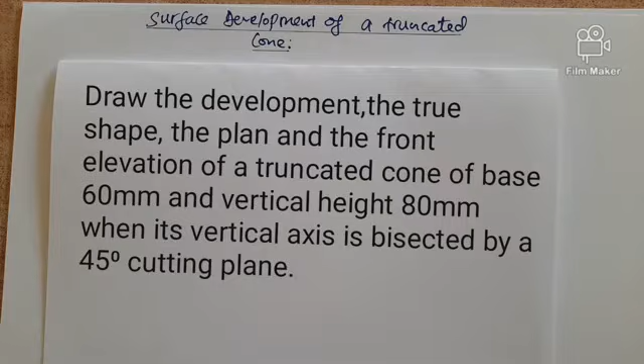are expected to. Now in this case, first of all, we are going to have our plan of our cone, which is a circle. Then we shall draw the front elevation, which will be in a shape of a triangle, although it's a cone, and then we shall truncate it at 45 degrees, a line at the center point of the vertical height of that particular cone.

So the first thing is to be able to draw our plan, and our plan, as we said, is going to be our circle. We are taking that one as our baseline. Then we're starting from there to draw a circle. Now a circle will be of radius 30 millimeter because the cone is of diameter 60 millimeter. So now we shall measure our 30 millimeter and then we draw the circle.

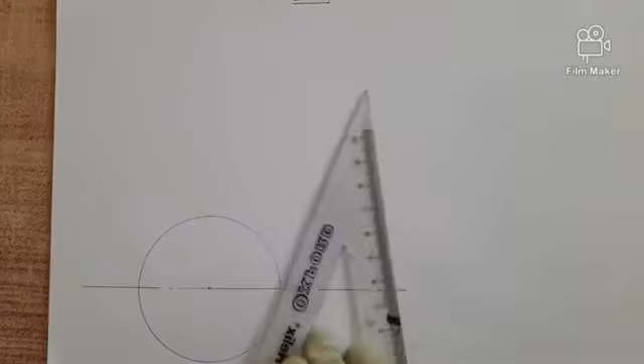That is our base. It is our circle. Now this circle is assumed to be our base for the cone. And then we are now going to draw the vertical height of our cone. And the vertical height, we shall project our center line through the center point of our circle so that it goes vertically up to be able to give us our front elevation. So this one's our center line.

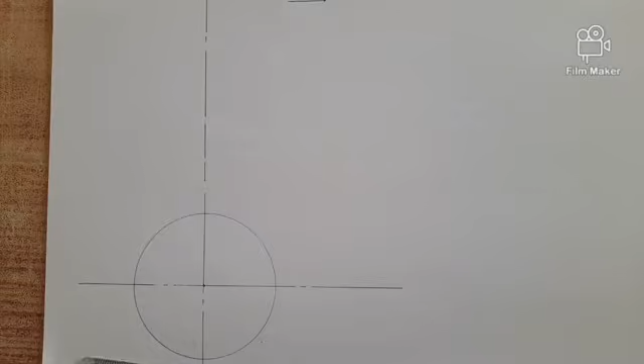So we can just draw it vertically upwards. Can go as far as you want. Then we shall draw our front elevation, of course, above our plan, and therefore it means we can have a horizontal base just above the plan. We have our horizontal base. This is a reference line for the plan.

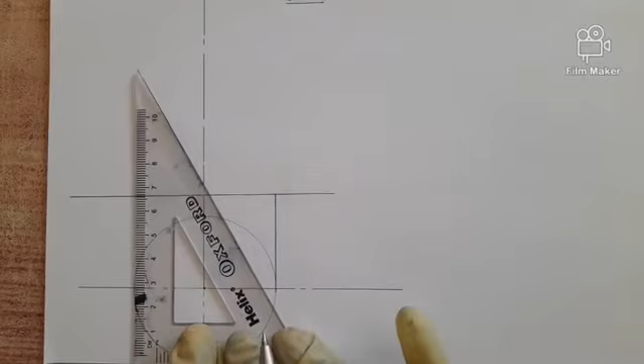Then we project lines from the plan to meet that horizontal base. So we project this to meet the base. We also project this to meet the base. The next thing we shall do is to measure the vertical height, and the vertical height is 80 millimeter. So we are going to measure 80 millimeter and we transfer it here. So this is our 80.

As you can see, this is 80. So this is the vertex. We can call this one point V as the vertex. Then we join it back to the base from the vertex. You can join it. The vertical height, as we said, is 80 millimeter. So you join it back to the base.

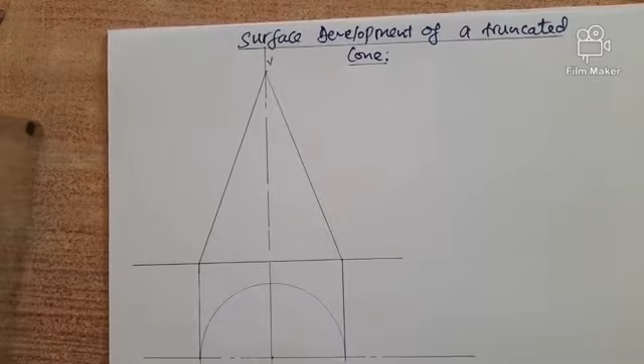Now, because this cone has been truncated by a cutting plane at 45 degrees to the horizontal, or bisected by a cutting plane at 45 degrees, it means it is at the midpoint where the line is going to pass through. Then we have to draw that particular line, and it is at 45 degrees to the horizontal. So we are going to have our midpoint, it is the 40th mark. So we measure from here up to the 40th mark.

Now this is our 40th mark. With your T-square and a 45-degree set square, you can draw the cutting plane through the point. So this is my cutting plane, cutting through the point. Then from there, we are going to divide the plan or the circle into 12 equal parts. How do we do it?

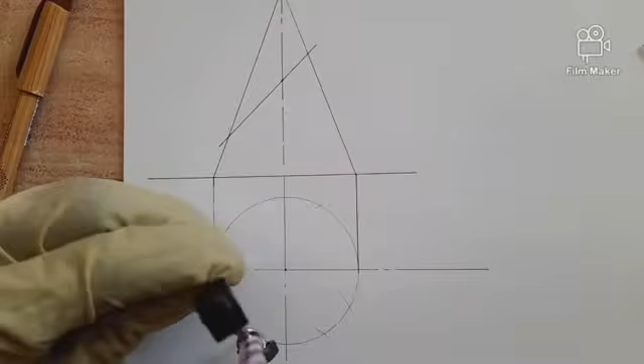We take the radius. With the radius, you can stand with it at the end point where the center line meets the circumference, and make arcs on the circumference. What we are doing is we are dividing the circle into 12 equal parts. So these ones are 12 subdivisions. You can join them correspondingly, so that this one and this one, you join them correspondingly.

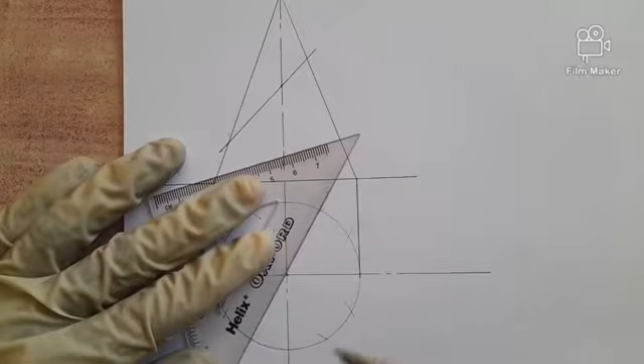Okay, we have joined that. We can also join this through the center point. There it goes. Now you can number them as 1, 2, 3, 4, 5, 6, 7, 8, 9, 10, 11, 12 parts. Okay, then we are going to project them back to our front so that we have lines joining to the apex.

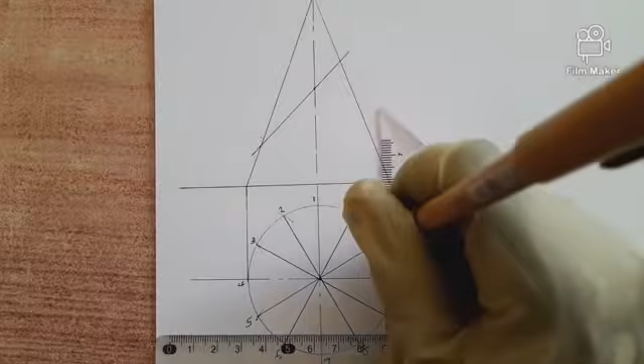So let's join those points to the base, or project them to the base of our cone. There, we bring this in that order. There we go. Again, we can name.

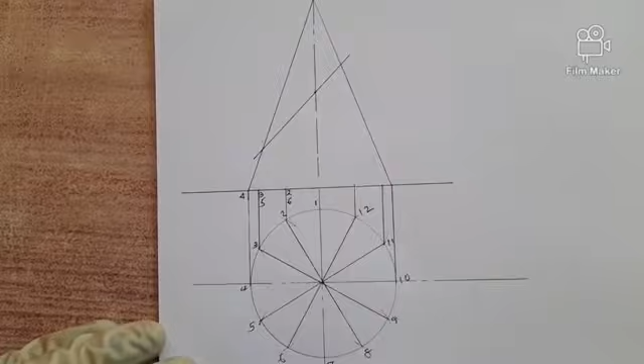This is point 4. This is point 3 and 5. This is point 2 and 6. This is point 1 and 7. This is point 12 and 8. And this one is 11 and 9. The last one is 10.

Okay. Now we want to finish drawing our front elevation so that we can have the truncated cone itself. This one, it means we are going to use an outline, because we are assuming these other ones are just construction lines. So this is our expected cone that has been truncated. So we join.

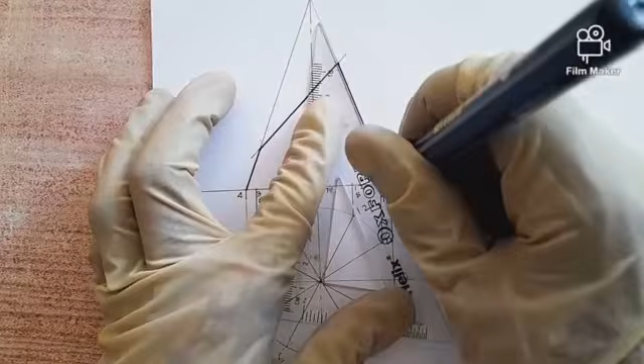Okay, now we are through with our front, although the plan we are not yet through with it, because we've not included the cut face, this cut face on our plan. We shall do it later. So we are going to join these points of intersection between the base and these vertical lines to the apex, so that this one is joined there. Okay, and then this one again, we join it.

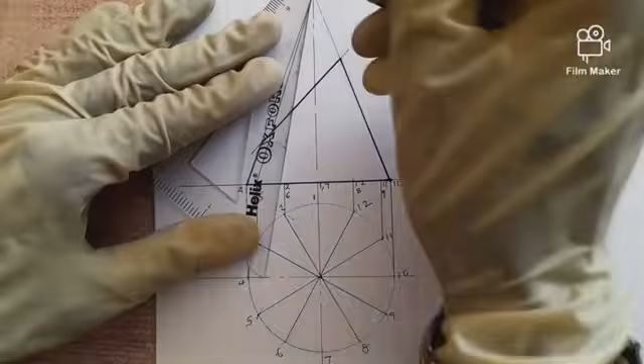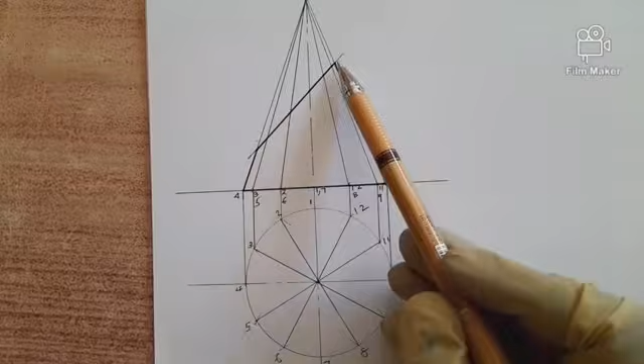Now, after joining them to the apex, we are going to drop them vertically downwards so that they meet our plan. See, what we are saying is this is the truncation line. We have these lines going to the apex. Where they meet the cutting plane, we drop them vertically downwards, because we want to transfer this face on our plan. So we are going to take our horizontal base together with a vertical edge to drop them vertically downwards, starting from the first one.

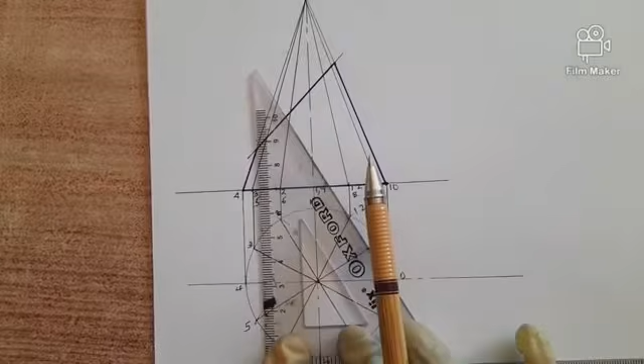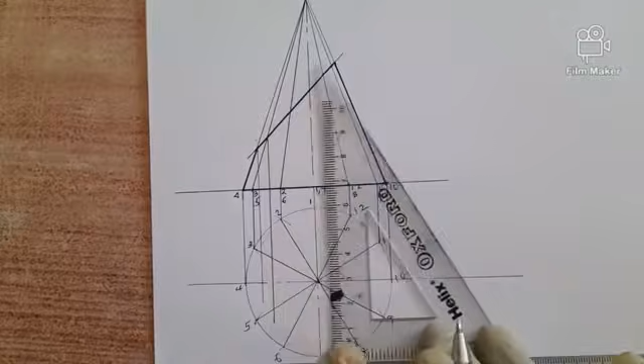Here it is, the point of intersection between the outer line and the cutting plane gives us that point. So this point. Then next we are going to drop this. Do the same thing. Come, drop this. Next, this one here. Okay, we look at it where it cuts, then we draw a line. We continue that way. So we have dropped them.

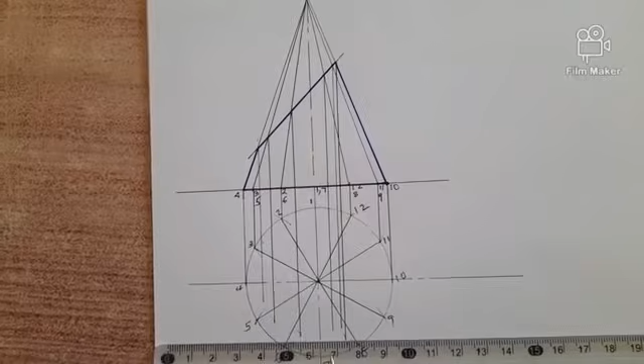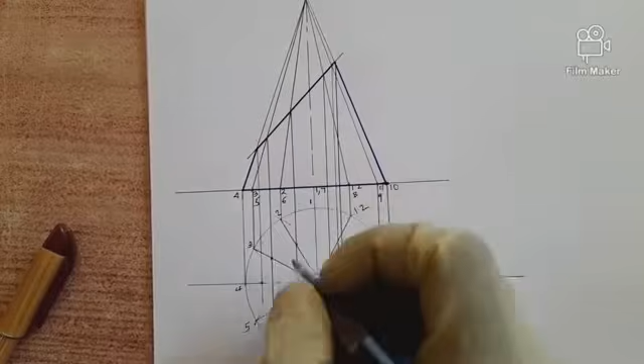Okay, now you'll realize that those lines that have gone downwards vertically will be meeting these radial lines, or these radii, at given points. For example, the first one that we dropped meets it there. The second one meets this radial line and this one here. Let me use a different pen. And then this one here meets it here and here. This one meets here and here, and this other one meets here and here, and the last one here meets there. So we are remaining with this line.

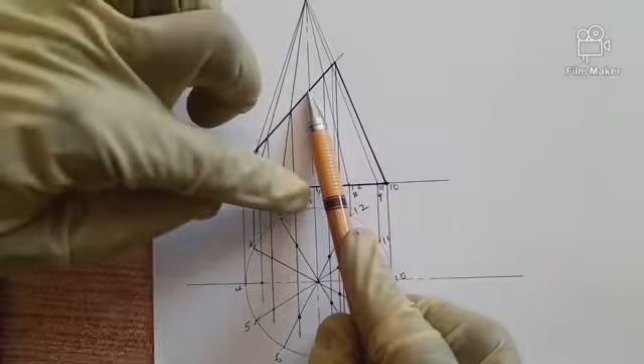We want to know where the curve is going to pass through on this line. How do we do it? We are going to draw a straight line parallel to the base from the point of intersection between the axis and the cutting plane back to our sloping line. Then you drop it down to meet this horizontal axis, this center line. Then we take this radius and draw a curve; where it cuts this line here and here gives us the 2 points where the curve will pass through.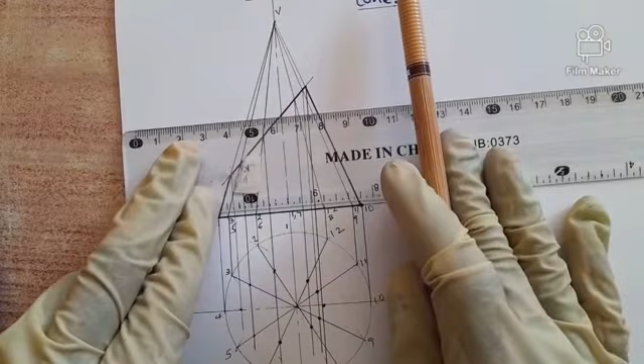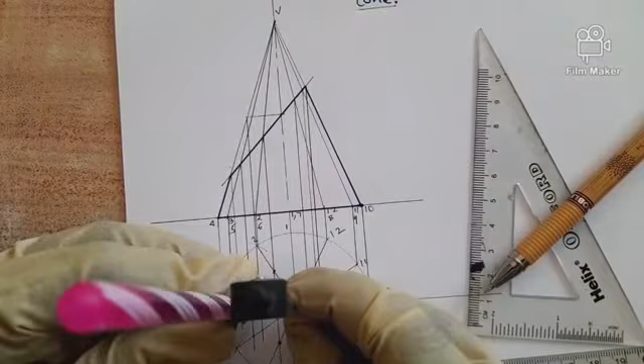So we first of all bring this line to our sloping plane horizontally. There it goes. Then we drop it vertically down. There it is. It meets there. Then we take this radius from the center and we draw a curve. You can draw this curve or just make arcs. Once we have it, we can establish this point and also this point.

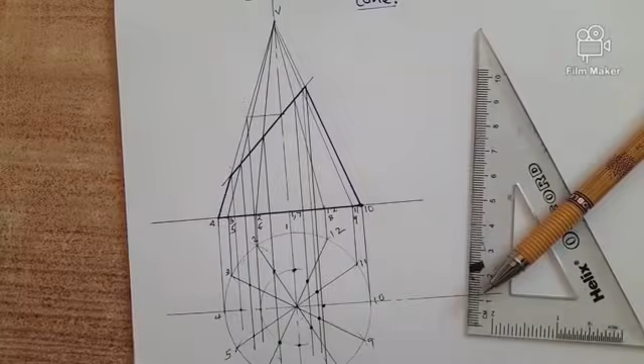So we are going to join them so that we come up with our inner part. And how do we join it? We can use what we refer to as French curves, or if we don't have them, we can join the points freehand, so long as a fine curve is maintained. So we have done our plan for our truncated cone. We have the inner part. This one represents the face that has been cut, and this one represents the outer part, the larger circumference.

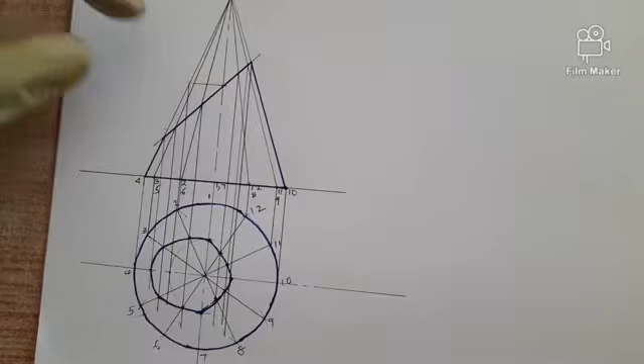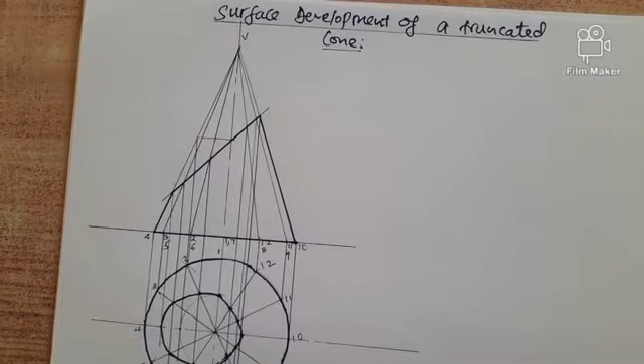Once we are through with that, we need to draw our true shape. True shape can only be drawn if you view the cut face at right angles. That is, you draw another shape of the plan on this other side so that it's perpendicular to the cut face. How do we do it? If we have a small space here, you'll have to draw it on the opposite side, because those lines are the same. If we pass a line through this point to this side, it's almost the same thing. So we can see whether it will fit here.

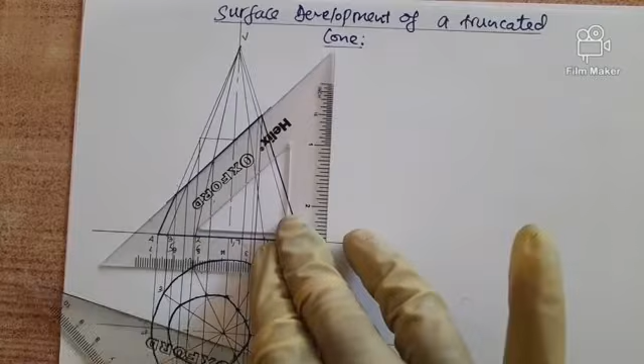It fits. So what I will do is, first of all, to draw a perpendicular line to the cut face. How do we draw the perpendicular line to the cut face? It is very simple. First of all, we can first pick this. Okay, this is the face. Now if this is the face, we want to draw a line that is parallel to it. So we can move this face parallel downwards to give some allowance for us to draw the perpendicular line.

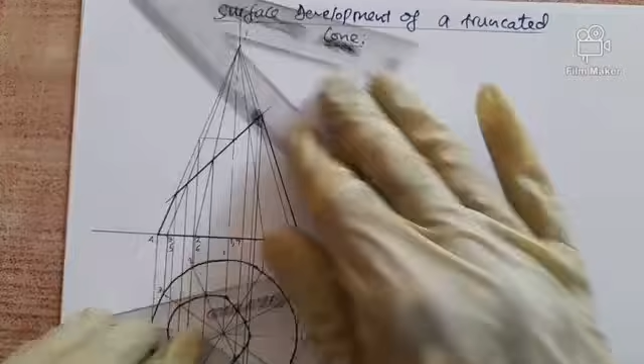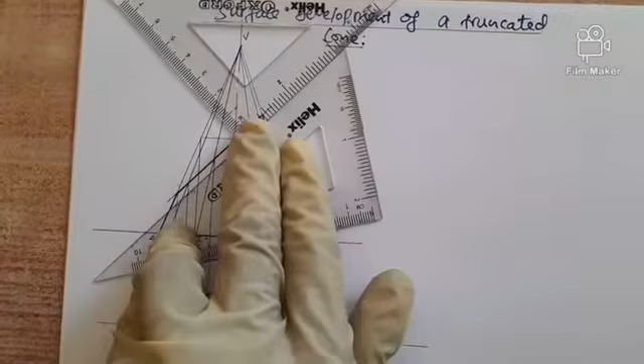Let's say this is the movement, so you move it this way. Once you've done it that way, you bring another line, you draw it. If this one has fluctuated, we can still repeat. You bring it here and then slightly just move it, you slide it on this side, in that manner. Then once you've done that, you come with your line that is perpendicular, and you draw it from this point. Of course, it is the center point.

You can do the same with all other lines. So the second line is this one here. You draw it in that order. So you continue drawing the lines. So those are the projections. What we shall do is we are going to carry these points individually, follow every line, and then we transfer them. What we are saying is, if you come at this point, because we expect to transfer this point, okay,

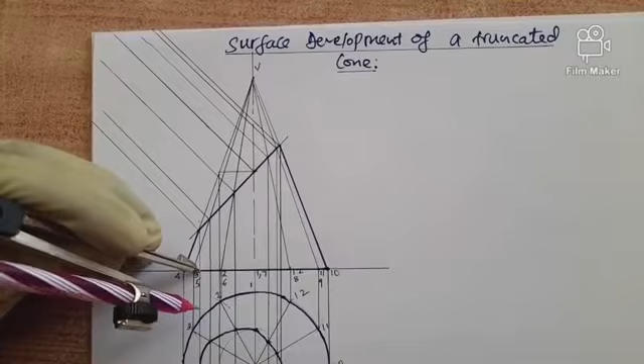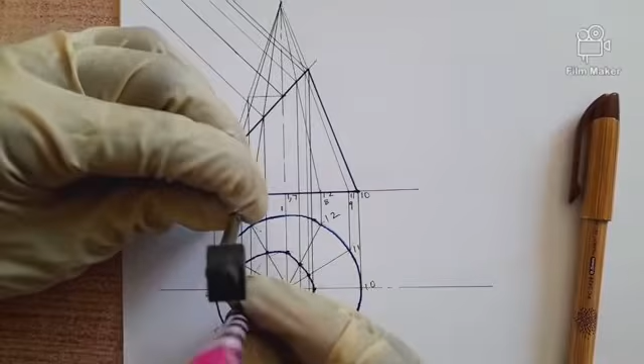this one here, you take your compass there, you come with it on the same line here, then you make an arc, okay. Next, we want to do this and this, so we carry it from here, we come here, we carry the first one, we come with it on the same line, we make an arc, we come back here, we carry the second one, and we come with it here on the reference line, we cut.

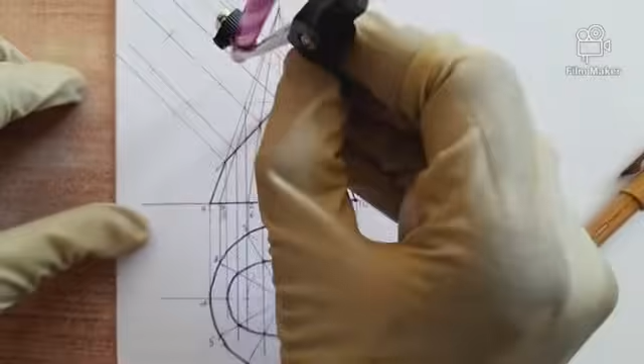Next, we want, which one? We want this and this, okay. So here we are going to use this point from here, the first point on the same line, we cut, we come from there, the second point on the same line, we cut. Next, we want this and this and this, here it is. So we are going to use this, take that on the same line, transfer it, come back, carry the second point on the same line, cut.

Next, we want this and this, so we use this as our reference, come, carry on the same line, you cut. Next, we want the other one, so we carry this, come with it, transfer. Next, we want this and this, okay, so we are using this, so here carry this on the same mark.

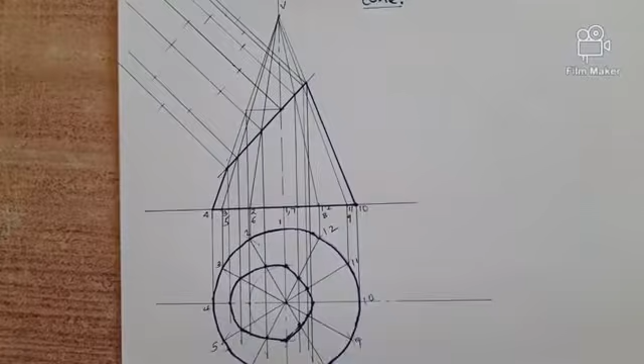Next, that, okay, same, transfer it. Lastly, we want this, so this one here we are using this, so this back here on it, here it is, finish. So we are going to join these points with a fine curve. So what we have drawn is the true shape of the cut face.

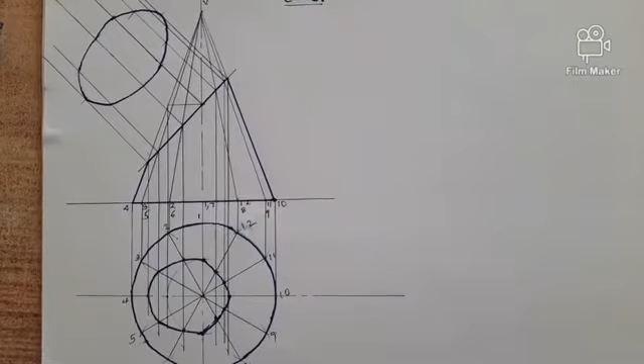The next thing we are going to do is to draw the development. How do we draw the development? The development is like we are going to unfold the truncated cone, so that we now have the net. We just carry the same distance, we transfer it. Now let's do it. We are going to carry this and we unfold it, it's like we are drawing a net. If we draw a net, it will cut through here, so we have to transfer this point V somewhere here because we need some more space. It is easier to do it.

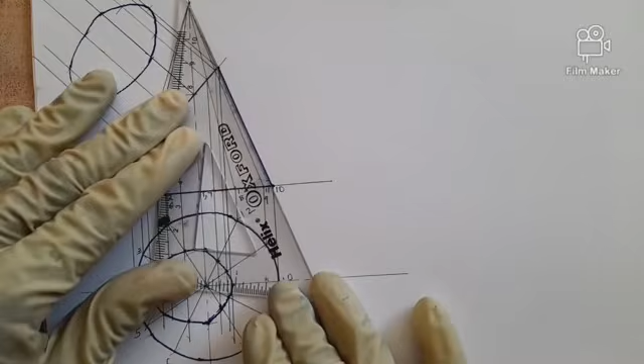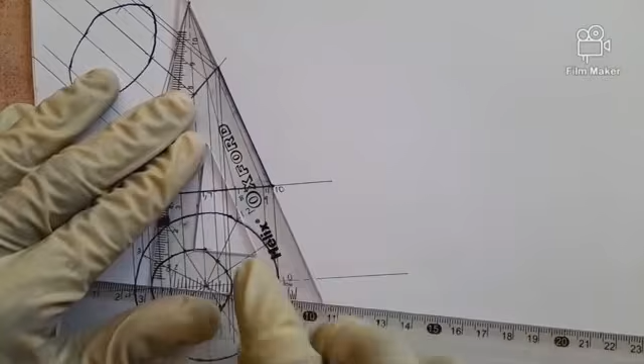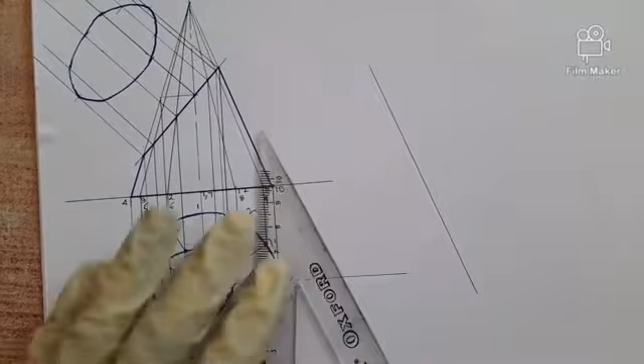So what do we do? We are going to first of all transfer this point to come up somewhere here. We can first of all have this line, and then we move it. How do we move it? It should be parallel. So if you want to move it, you can first of all realign, and then that's the movement. We have moved it. Here it is. So we can now draw it here. You can as well draw it to any length or measurement you want.

Now let's say you want your V to start from here. This is V, okay? So you take your slant height, here it is, and come with it and draw a net.

We draw our net. Okay, now we do not actually know the angle subtended by that arc. How do you know it? First, we have to calculate by saying that that angle equals r over true length multiplied by 360. Our r is 30 because we're using 60 as the base. Our true length is from this point to here, okay? Or it's like the slant height.

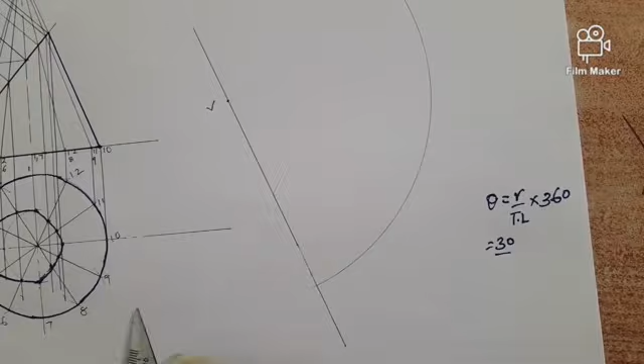And then this slant height here, how do we get it? We use the height and the base. So we are going to use height squared plus base squared, okay? And then we take the square root, and we multiply by 360 degrees. So this is 30 all over the square root of height squared plus b squared. Let's see what we shall get.

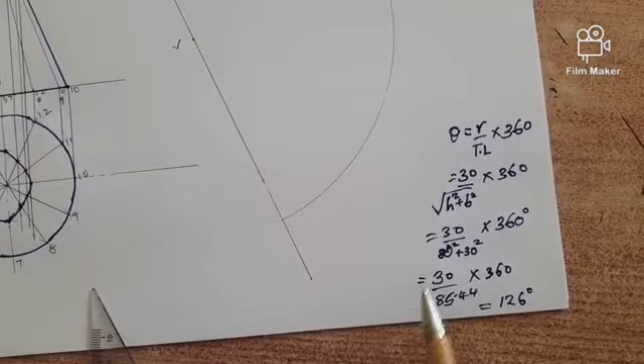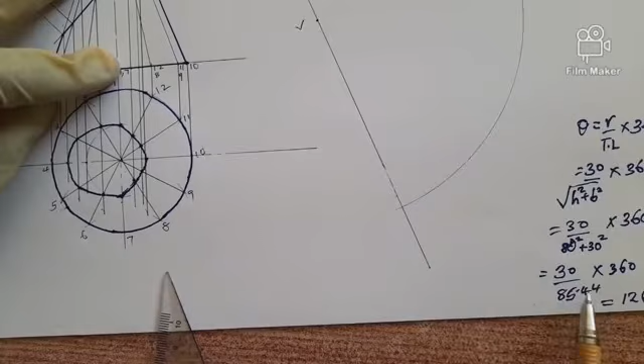So when you calculate, you realize that our height was 80 squared plus our base, 30, the radius base, this distance from here up to here, because this is 60 and this one becomes that. So it's like we are taking this triangle with height 80 and base 30. So the hypotenuse is this one squared plus this squared, then you get the square root. We get it as 85.44, meaning this is the true length. So if you calculate using 360 degrees, you get the angle as 126.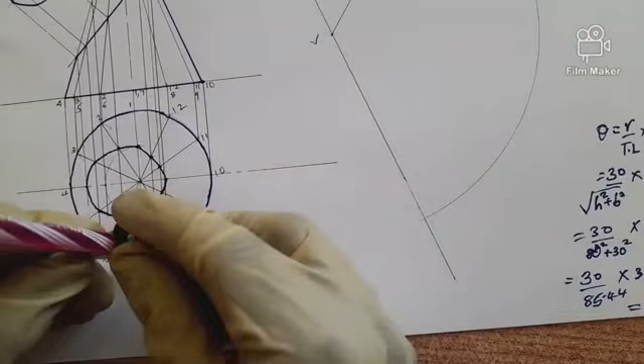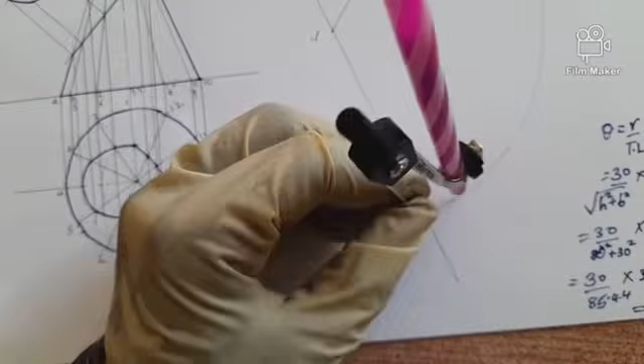So we are going to measure 126 from here. So we measure 126. So 126 passes through this point here. Okay. Once you have that, we are going to take this measurement, these 12 parts, and you transfer them. Okay, the way they are, we are going to transfer them along this. They are going to be 12 in number. So we just step; we call it stepping off.

So we have stepped them, although you realize that they might not be equal to the last one. Why? Because this is estimation. We cannot say you are stretching this one to form a straight line and it gives you the true measurement. Because our angle we did through calculation, we did not estimate, and that's why it is that way.

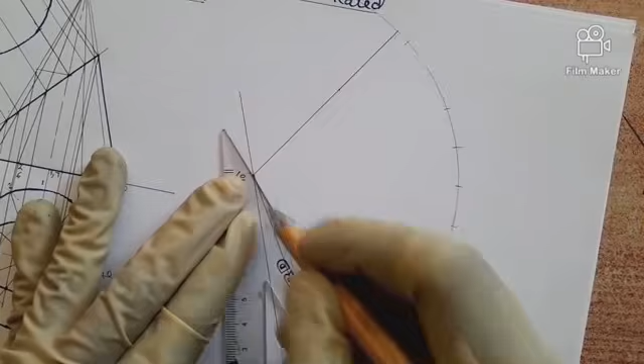So we can join. So if we want to unfold it from this point, it means you start by having your 4, you continue 5, 6, 7, 8, 9, 10, 11, 12, you come back to 1, 2, 3, 4. That means if you start with 4, you end with 4. Then we are going to carry this from here to every point, okay? Then we bring and draw arcs. So that means the first one is here.

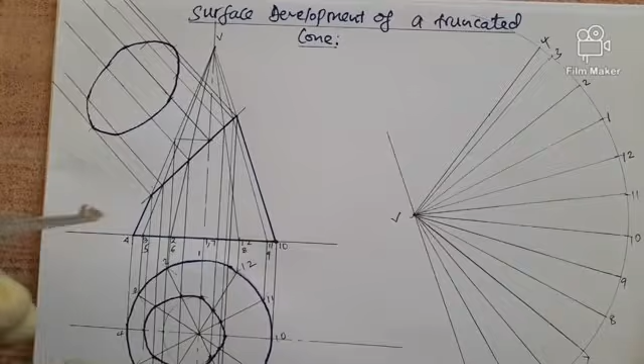Okay, what I'm saying is we are going to transfer these points. This one, this one, this one, and the last one on our net. How do we do it? We just carry these distances and we come back and draw curves. So we can start with the farthest one. Then you come with it here and you draw an arc.

There's some blurring, sorry for the blurring. I think it's some lens adjustment.

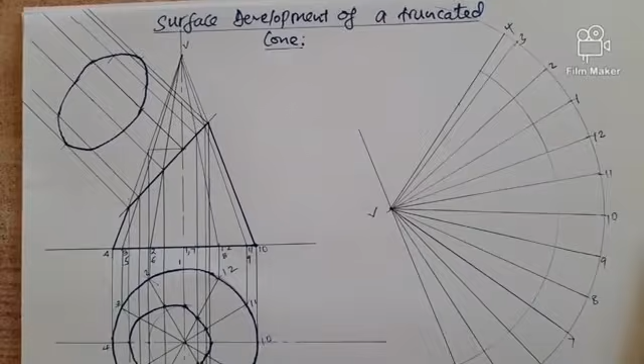Okay. Next is this one. So we pick that, come, draw an arc. Next, the third one. Here it is. We have done this. Now this one here. Then you take that distance and you transfer this. Next, the center one. Okay. So we take this, transfer. Next, this. So you have transferred.

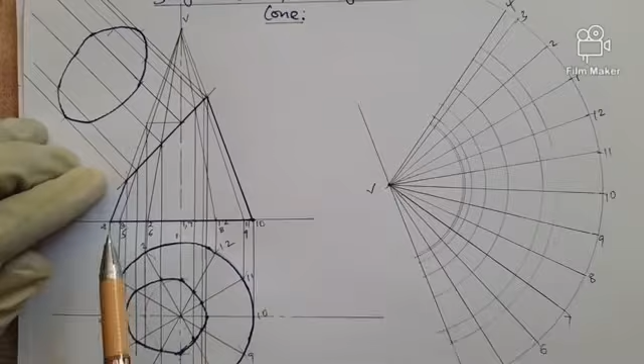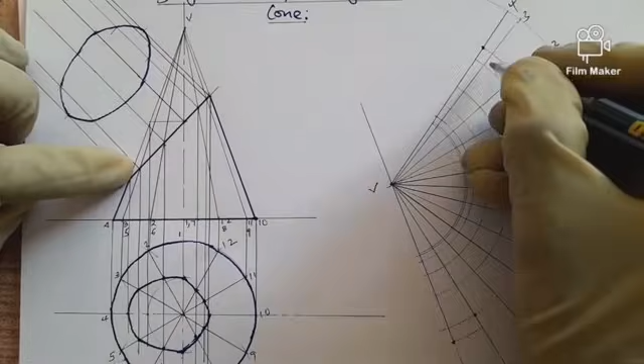Now the next thing is we want to locate the points, so like for the first one is point 4. Here it is. So we come back here. This is the line, the last line. We look for where point 4 is, we put a dot. In this case, we are going to have a point there, and on the same line, we put another one here. Next is 3 and 5. These are the lines 5 and 3 on the same line. Where is 3? Here it is on the same line.

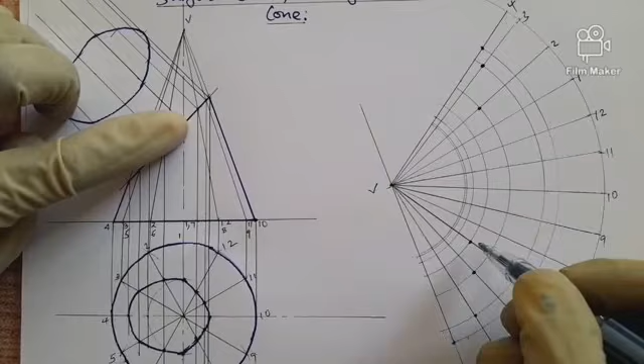Next is 2 and 6. On this line, we look for where 6 is. Look for where 2 is. Here it is. Next is 1 and 7. So on this line, we look for where 1 is and where 7 is. 1 is here. Okay. Next is 12 and 8. So on this line, we look for where 8 is and 12 is. This is 8 and this is 12.

Next is 11 and 9. So we look for where 11 is and 9 is. Here is 9 and here is 11. Then lastly is 10. So on the last one, we look for where 10 is. Then all those points can be joined with a curve. So you have joined with a curve, and also this other end, because it's a net diagram for a development, the outer part will also be joined.

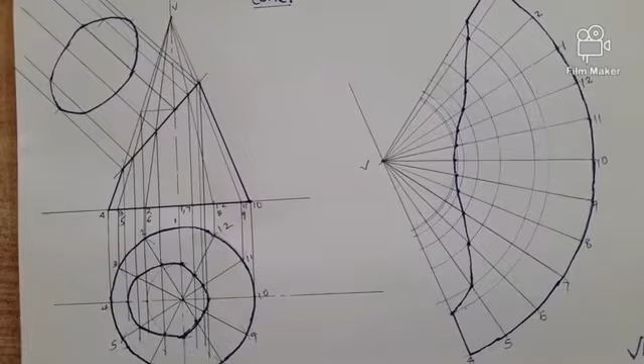So that is what we were supposed to draw. As you can see, we have our plan, our front, our true shape for the cut face, and our development for the truncated cone.